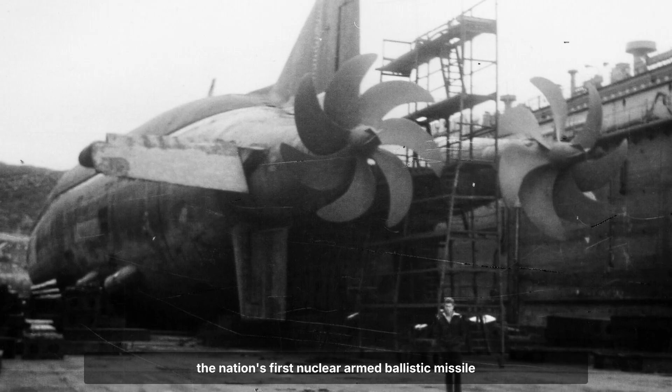By the late 1950s, the Soviet Union faced a new kind of threat beneath the waves. The United States had fielded Polaris submarines, boats that could launch nuclear missiles from hidden depths, far from any warning. In Moscow, this was seen as a direct challenge to Soviet security. Orders went out to match the American advantage and to do it fast. Project 658 was born, a crash program to deliver the nation's first nuclear-armed ballistic missile submarine.

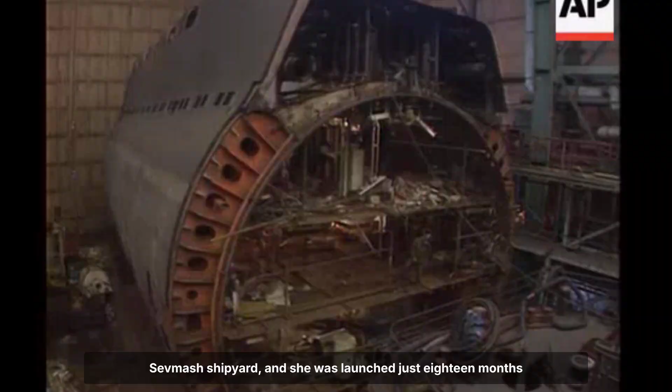K-19 was the lead boat. Her keel was laid in October 1958 at the Sevmash shipyard, and she was launched just 18 months later in April 1959. The pace was relentless. By November 12, 1960, K-19 was officially commissioned into the Soviet Navy, even though much of her final fitting and testing was still underway. The schedule had been set, and the work was forced to keep up with the rush.

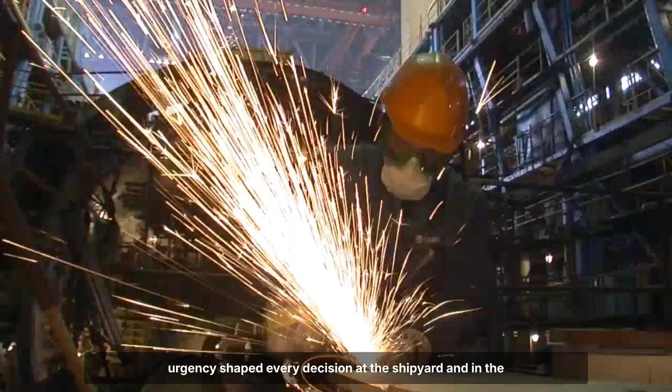The drive to get K-19 to sea was not only about pride. Soviet land-based missiles were limited in range and accuracy. Submarines carrying nuclear R-13 missiles, each able to strike targets up to 650 kilometers away, offered a way to close the gap. A working submarine force was a vital deterrent, and that urgency shaped every decision at the shipyard and in the fleet. That urgency also produced compromises.

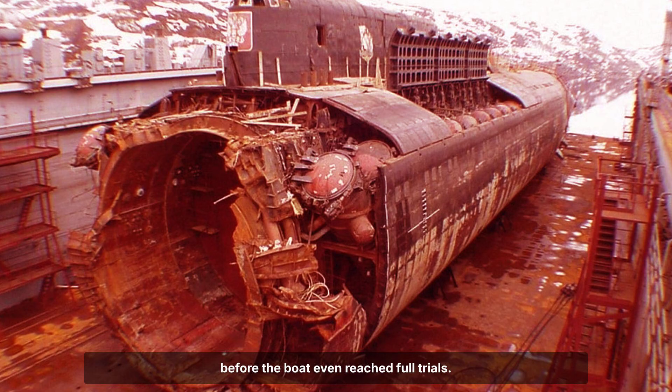Shipyard workers raced deadlines, sometimes at the expense of quality. Inspectors flagged welding flaws, electrical fires, equipment failures, and an overall sense that the boat was unfinished. An accident in the ballast tanks killed several workers before the boat even reached full trials.

The crew assigned to K-19 quickly sensed the risks they were inheriting. In whispered conversations, a nickname surfaced: Hiroshima. It was a sign of the unease that ran through the ranks, a quiet warning that something fundamental may have been overlooked in the rush to build a weapon for a new era.

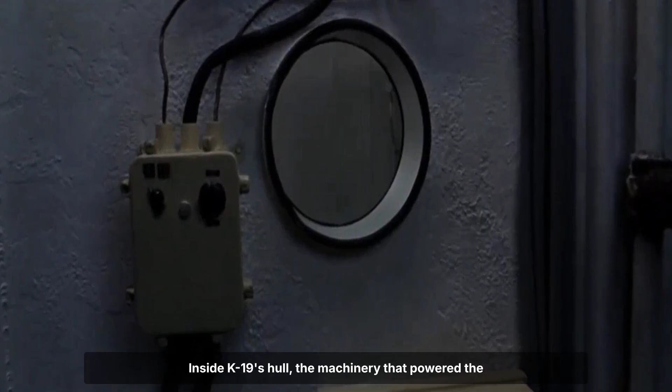Inside K-19's hull, the machinery that powered the submarine's nuclear heart came with a silent flaw. During construction, a pressure test meant to prove the strength of the reactor's primary cooling system went wrong. A missing gauge allowed pressure to climb to 400 atmospheres, double what the piping was designed to withstand. The officer in charge failed to report the overstress, and the pipes, now weakened, stayed in place.

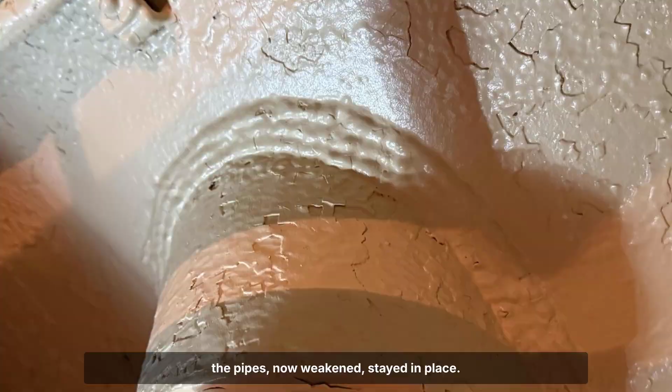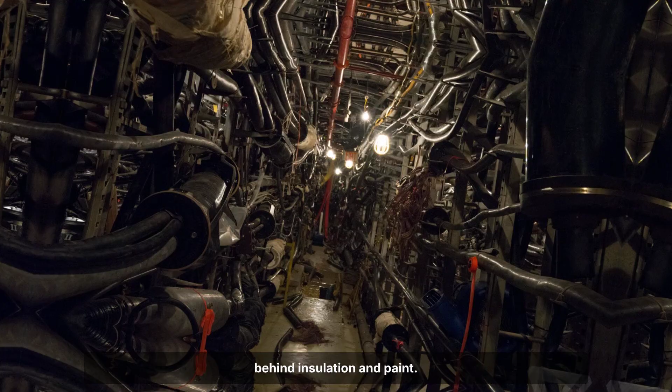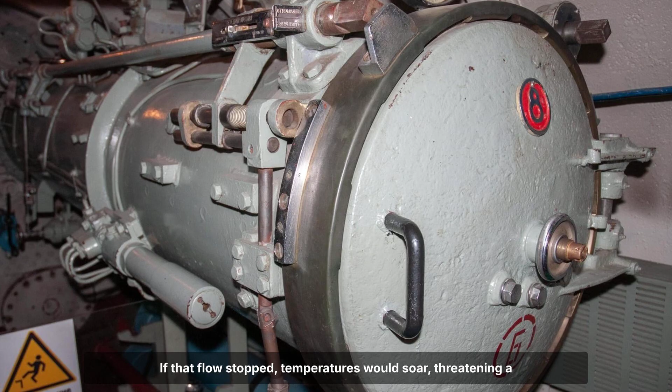Shipyard defect logs from Sevmash listed welding cracks and unfinished joints, but deadlines took priority. The result was a reactor loop with invisible damage, hidden behind insulation and paint. A pressurized water reactor like K-19's depended on constant circulation of coolant to carry heat away from the core. If that flow stopped, temperatures would soar, threatening a meltdown.

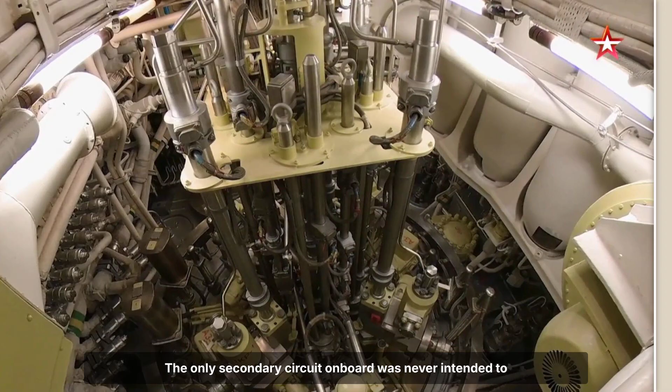Western navies built in backup cooling circuits for emergencies, but on K-19, the backup system was left out, cut from the final build to save time. The only secondary circuit on board was never intended to handle a full loss of coolant. If a leak developed, there was no engineered way to restore cooling under pressure.

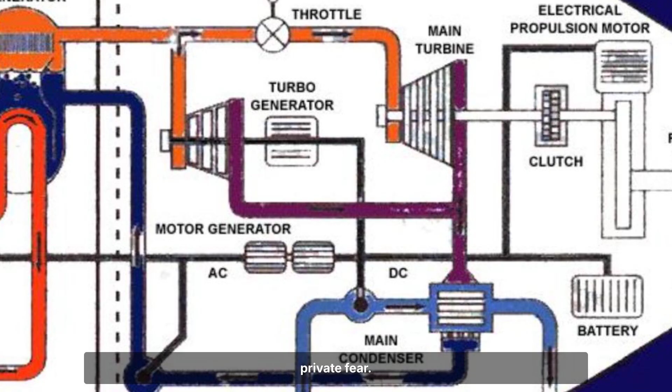Crew members understood the risk. The boat's reputation spread through quiet conversations below decks. They called her Hiroshima, a name that captured their private fear. If the reactor failed, there would be no second chance. The ticking clock was built into the steel itself. Every patrol sailed with the knowledge that a single crack, hidden since the pressure test, could one day decide their fate.

In June 1961, K-19 moved silently through the North Atlantic, its steel hull carrying 139 men and 3 R-13 nuclear missiles. The patrol route hugged the icy edge of Greenland, threading between NATO surveillance and the ever-present risk of being discovered. Captain Nikolai Zateyev, seasoned but wary, led his crew through routines that left no room for mistakes. Every man aboard understood the weight of their orders to demonstrate Soviet power far from home with a submarine that had never seen real combat.

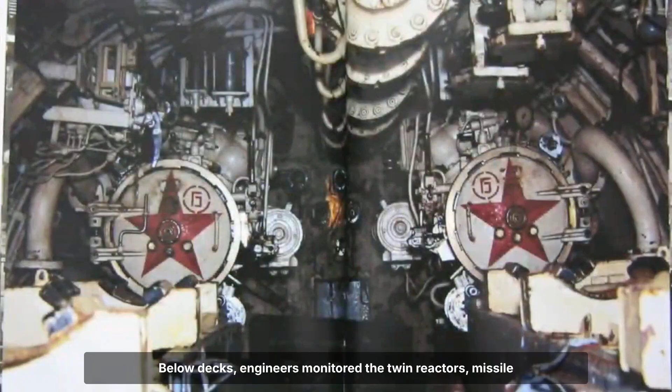Below decks, engineers monitored the twin reactors. Missile technicians checked warheads, and sonar operators listened for the faintest sign of enemy ships. The missiles, each with a reach of 650 kilometers, sat ready in their tubes, a silent warning to anyone watching from across the ocean. The air was thick with the hum of machinery and the unspoken knowledge that any failure, no matter how small, could be catastrophic.

There was no backup boat trailing behind, no quick rescue if disaster struck. The responsibility for the nuclear arsenal and for every life aboard rested on the crew alone. Each shift passed in a mix of routine and tension as the men waited for the patrol to end and hoped the submarine would survive the cold, relentless Atlantic.

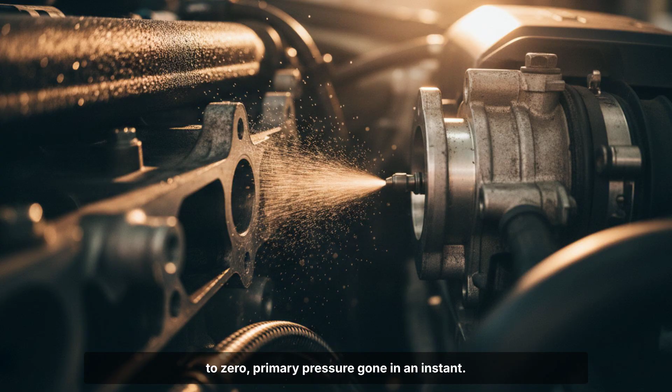Alarms erupted in the control room just after 4 in the morning. Gauges for the starboard reactor's cooling system swung hard to zero, primary pressure gone in an instant. The engineering watch scrambled to confirm what the instruments were telling them.

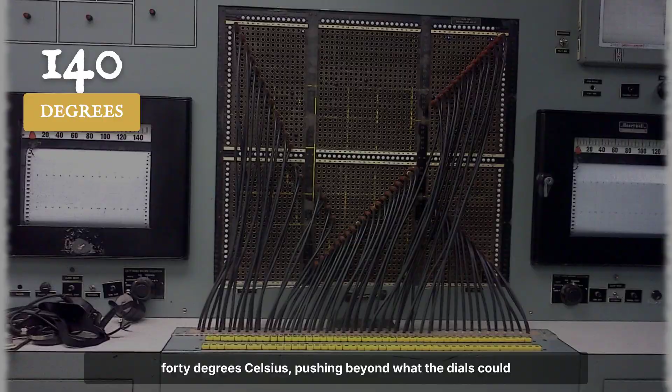In the reactor compartment, the sound changed. Pumps whined without resistance, and steam hissed through the bulkheads, thick and acrid. The temperature in the compartment shot past 140 degrees Celsius, pushing beyond what the dials could measure. Condensation dripped from pipes and pooled on the deck, carrying invisible danger with every drop.

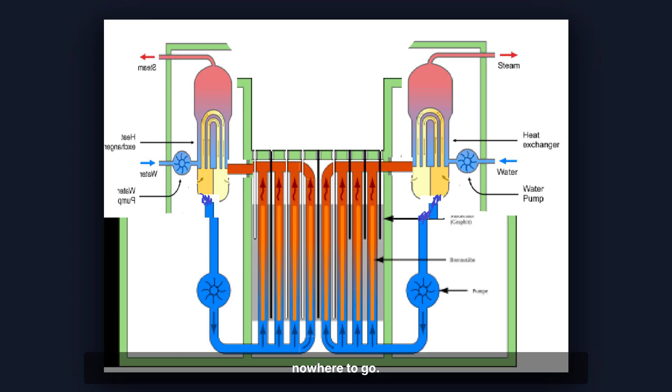The crew knew what a sudden pressure collapse meant. Without forced circulation, heat from the reactor core had nowhere to go. Water in the primary loop started to boil, filling the compartment with radioactive steam. The emergency shutdown system had already dropped the control rods, but decay heat kept driving the temperature higher.

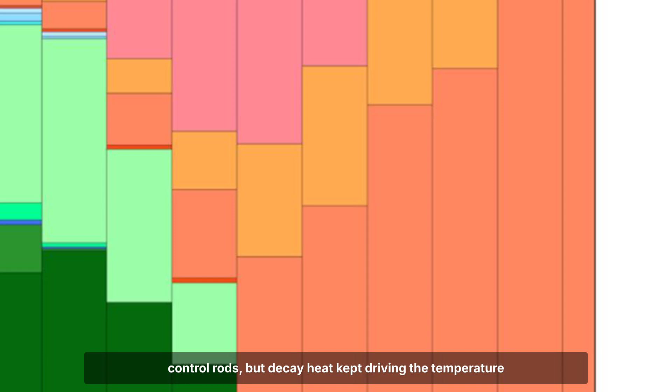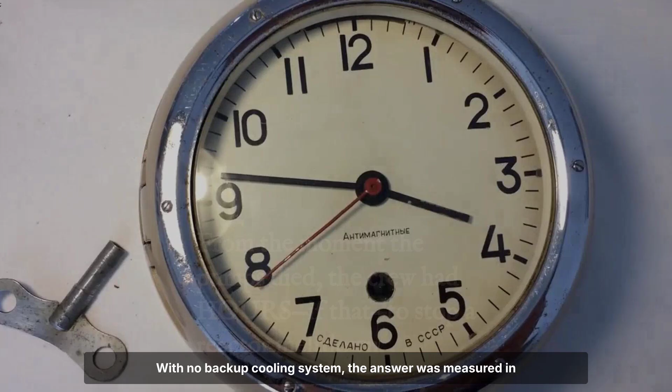In minutes, the air in nearby passages grew heavy and hot, the metallic tang of radiation mixing with sweat. Engineers ran calculations in their heads, how long before the core reached the point of no return. With no backup cooling system, the answer was measured in hours, not days.

The realization spread among the watchstanders. The only thing standing between the crew and a nuclear catastrophe was the ability to improvise and the willingness to risk everything. The countdown had started, and every passing minute narrowed their options.

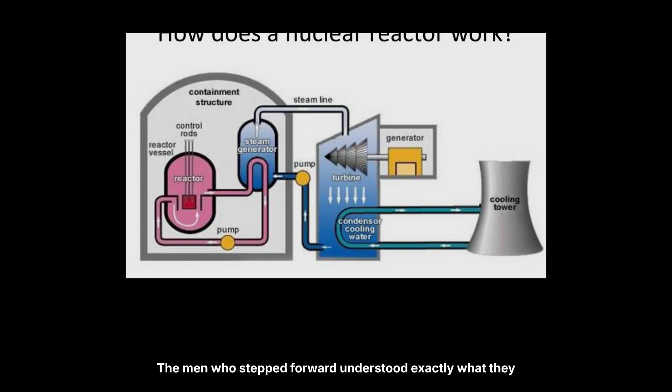Captain Zateyev gathered his engineering officers in the cramped control room. The only way to stop the reactor from melting down was to build a new cooling loop right there in the belly of the submarine. He asked for volunteers. The men who stepped forward understood exactly what they were facing.

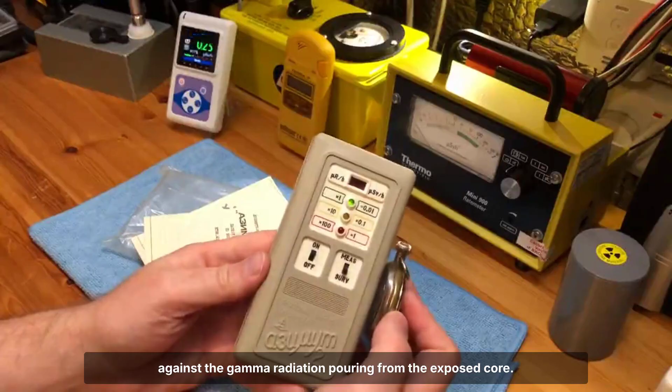Every entry into the reactor compartment meant walking through a cloud of radioactive steam, with the air thick and scalding, and the walls slick with condensation that carried invisible death. They wore only raincoats and respirators, no real protection against the gamma radiation pouring from the exposed core.

The repair teams worked in short, brutal shifts, 5 to 10 minutes at a time, never longer. Anything more would guarantee death even sooner. They cut and welded pipes from the drinking water system, using what little they had to improvise a new coolant circuit. The radiation in the compartment was so intense, by later estimates, hundreds to thousands of Roentgens per hour, that even a handful of minutes meant a fatal dose.

Survivors would later recall the taste of metal in their mouths, the skin on their faces burning, and the sense that time itself was running out. By the time the makeshift loop began to circulate water through the reactor, several of the volunteers were already showing the first signs of radiation sickness. They had bought the submarine a few precious hours, but at a terrible price.

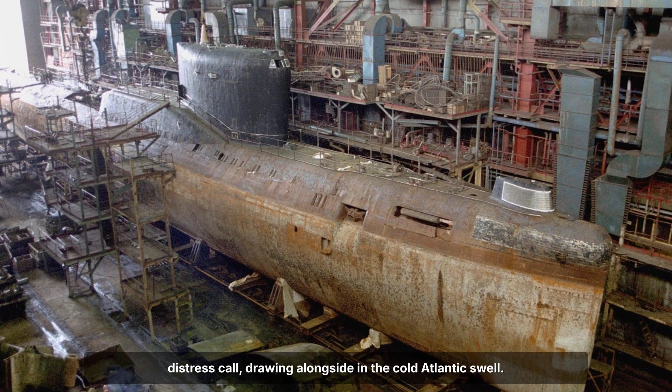7 hours after the first alarms, relief finally appeared on the horizon. The diesel submarine S-270 answered K-19's distress call, drawing alongside in the cold Atlantic swell. By then, the true cost of the repair efforts was already clear.

8 men had received fatal doses of radiation during the desperate work to keep the reactor from melting down. Their symptoms had set in rapidly: vomiting, blistered skin, confusion. Some were too weak to move by the time help arrived.

Transfer to S-270 was dangerous in its own right. The sea was rough, and many of the crew were already gravely ill. Men were moved across lines and rafts, bundled in what clothing could be found, but the urgency left little room for ceremony. Once aboard the rescue submarine, the most severely affected were isolated as best as possible, but no one could escape the knowledge of what had happened.

Orders from above soon followed. Every survivor was instructed to remain silent about the accident. Official secrecy covered not just the technical details, but the very cause of their shipmates' deaths. Families received only vague explanations: training accidents or sudden illness, nothing more.

Grief was forced underground, replaced by a discipline that demanded silence even as the tally of the dead began to rise. The crew's sacrifice was buried in classified files, their story hidden from the world for decades, and decades later, nuclear navies still operate behind classified walls.

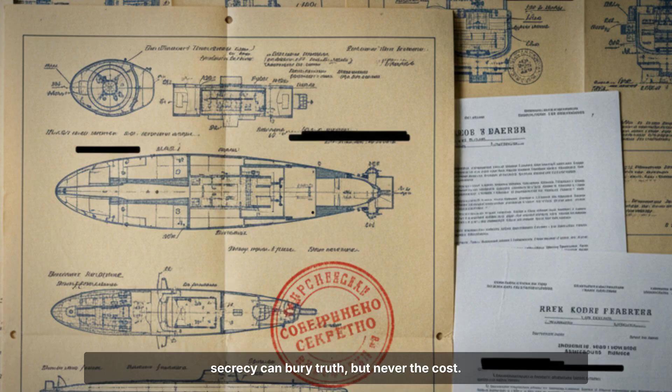As new technologies race ahead, the lesson of K-19 endures. Secrecy can bury truth, but never the cost. Every system built in silence risks repeating old mistakes, this time with stakes that reach far beyond any single crew.